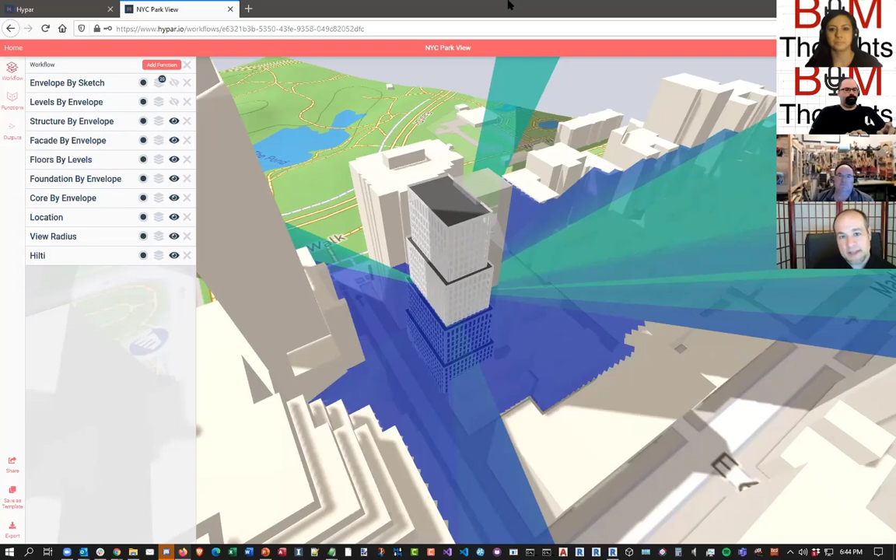All of this is in service of creating a generative design environment where you can combine things we call functions to produce design proposals, like I'm showing you here. This is a site in New York City, and we can actually rebuild a lot of this while we're talking. What you're seeing is a building on this site, with some analysis going on around what views you can see from that height of the building.

A lot of this is adjustable, but the fun part is if I go to this function here and isolate it in context, zooming way in, you can see we've got the beginnings of a piping system, with hangers and everything. That's actually an imported STL of a Hilti hanger—Hilti makes available 3D assets for a lot of their catalog, so we just grabbed one to demonstrate that we could include it.

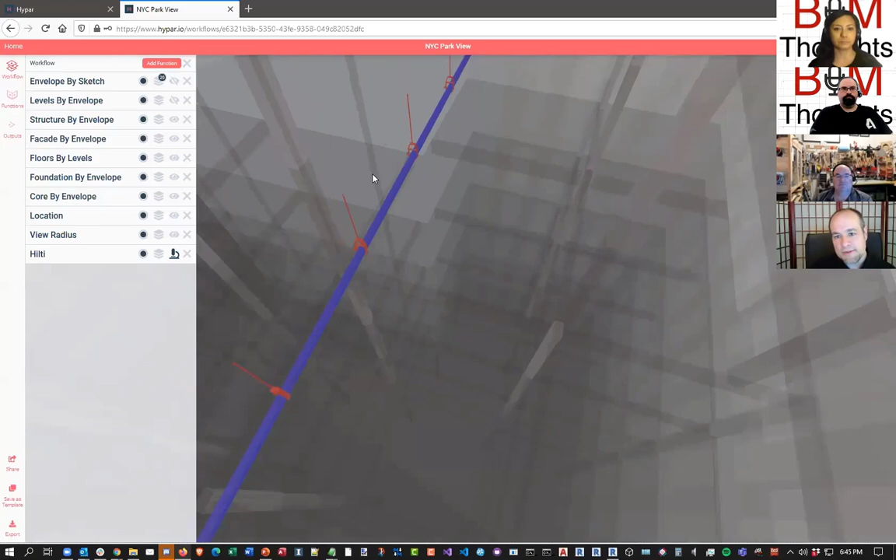The thing is, we're working at this macro, urban scale, all the way down to this very particular device inside a building. So we've gone from a mile down to a hanger, and then hanger back to a mile.

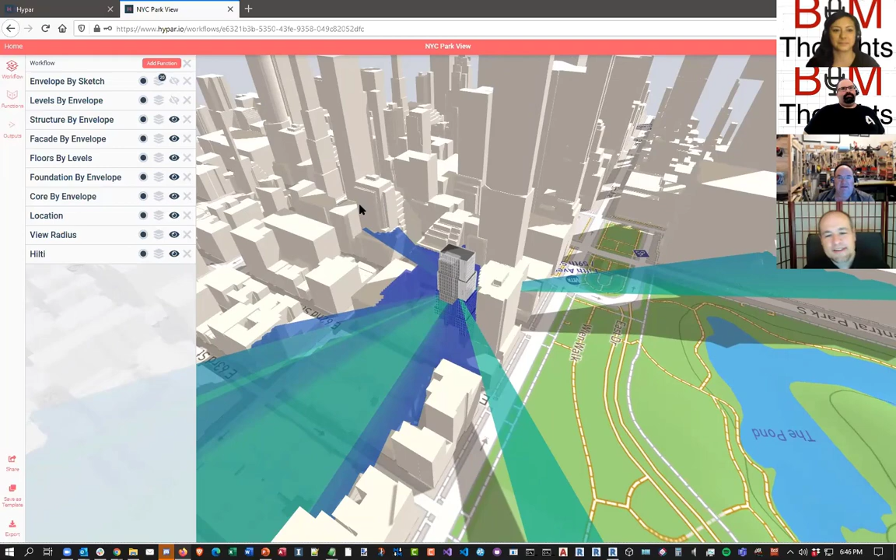Yeah, I'm trying to let our audio people know what's going on as well, since not everybody's watching. Sorry for this. I'll describe more as we go—that's okay if you're not. It looks like Ghostbusters is in there trying to get rid of some ghosts. We can turn that off so it's not so distracting.

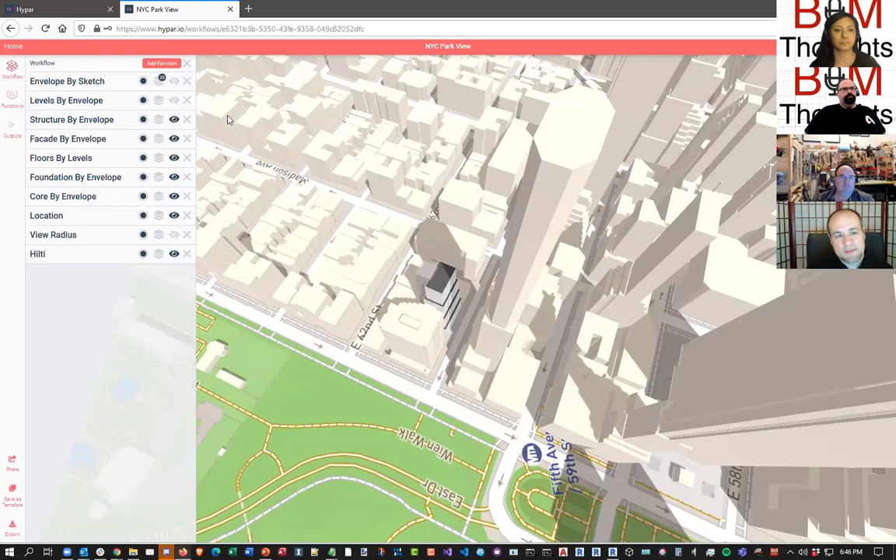Anyway, if we take this apart, on the left of the screen—for those just listening—there's a pile of things with different names, like envelope by sketch, levels by envelope, structure by envelope, etc. It's just a naming convention we use to talk about dependencies.

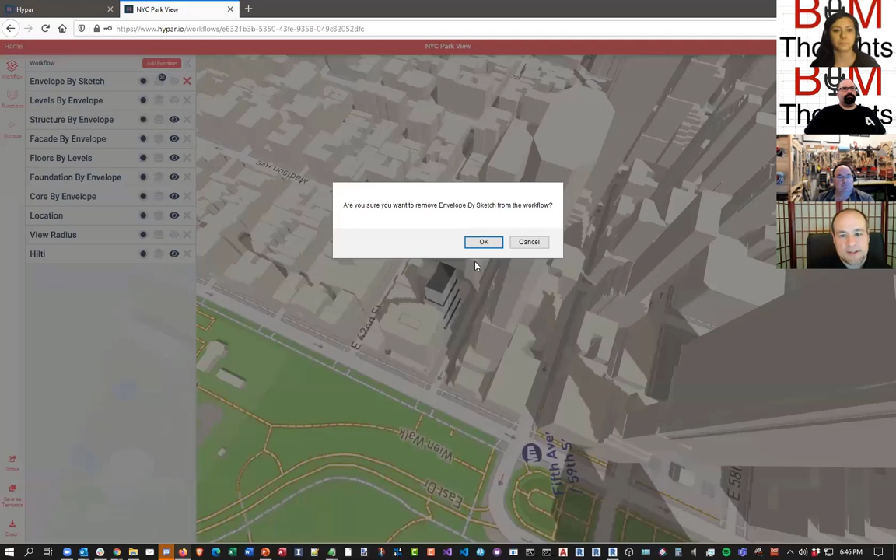So let's break everything here—let's just take envelope by sketch out of the workflow, and all of a sudden everything's going to panic, because there's a lot of stuff that wants a building envelope. So let's give it a new one.

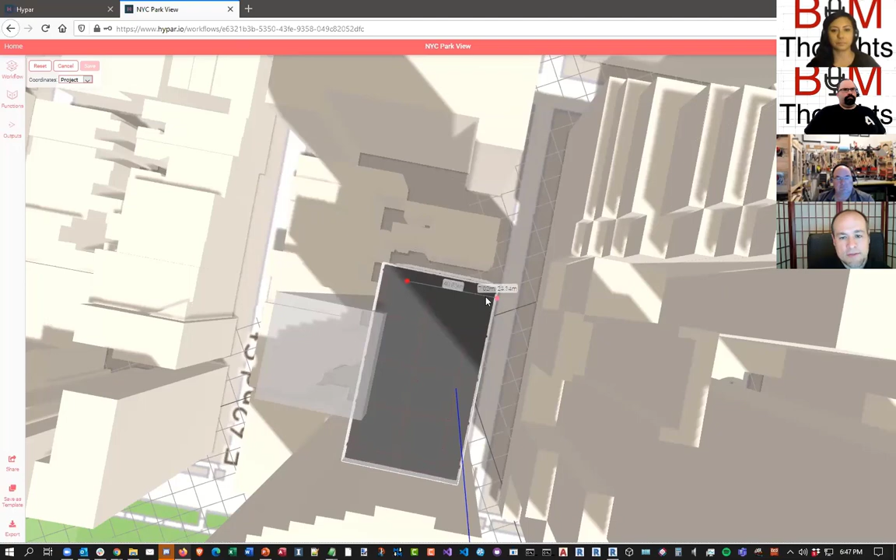Let's add a function, and add envelope by sketch back in. Now it's asking for some input—we'll draw a new polygon, something funkier here. We'll draw like a... oops, maybe not right inside the other building—yeah, that would be bad. But if we give it a different shape here, opening up some space on the site, and save that.

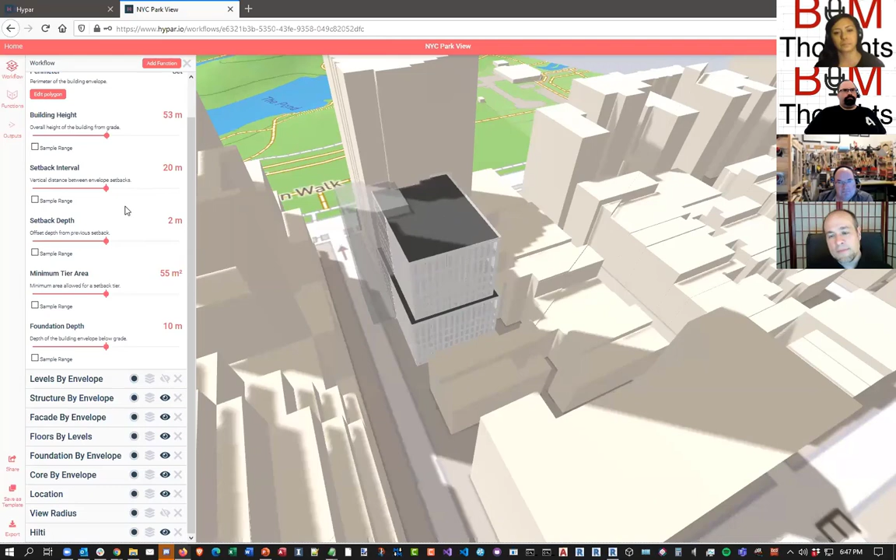What happens is we start generating a new building fabric, and all the other functions start contributing their piece to the proposal, with some greater or lesser success. If you're watching, you can see my marksmanship has somewhat failed, and I've embedded one building inside an existing building—which generally the building commission would call an addition.

In any case, these are all examples we have on our site just to show people the kind of thing you could do with Hypar. We've gotten some good reactions from folks on some of these functions that they find they can use. And the thing is, they're all combinable.

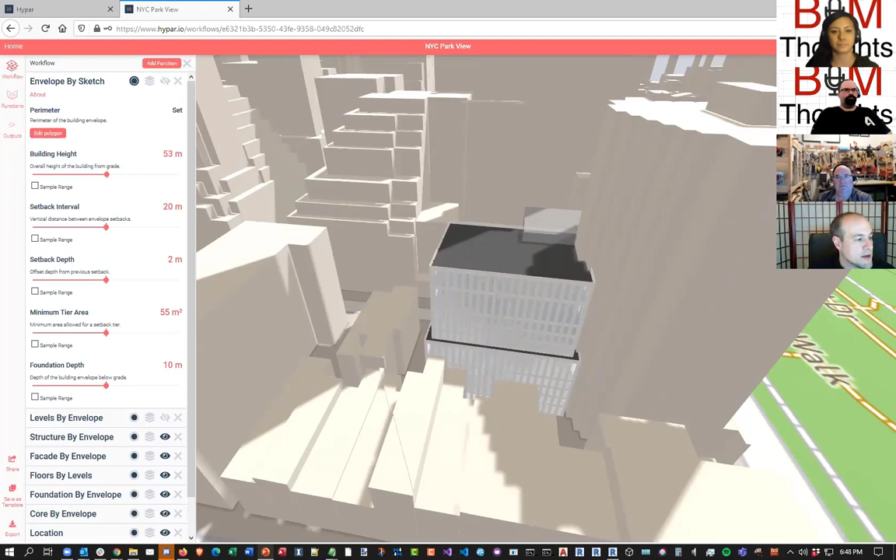I'm going to switch over to a more abstract look at this. Let's bring up the presentation, because what would Zoom be without PowerPoint, really? Taking the audience back to math class—everybody remembers what functions were: you put some numbers in one end, and other numbers come out the other end.

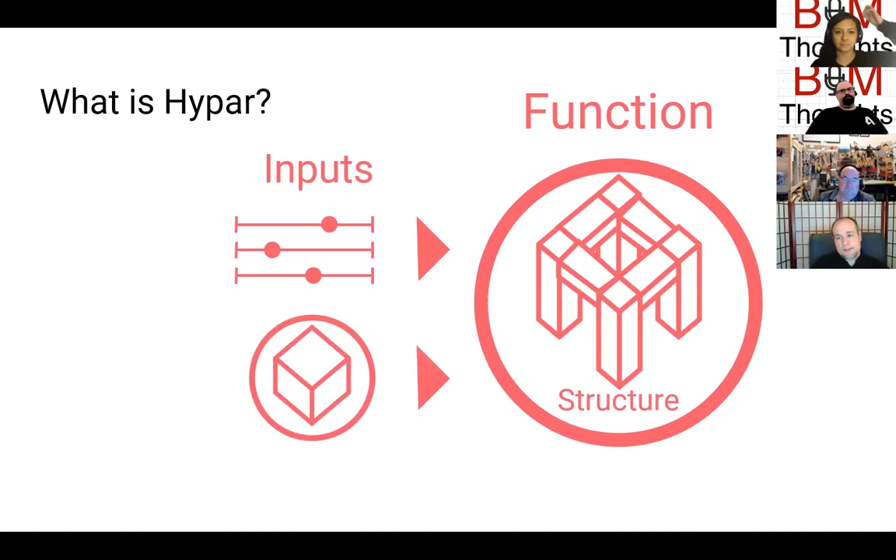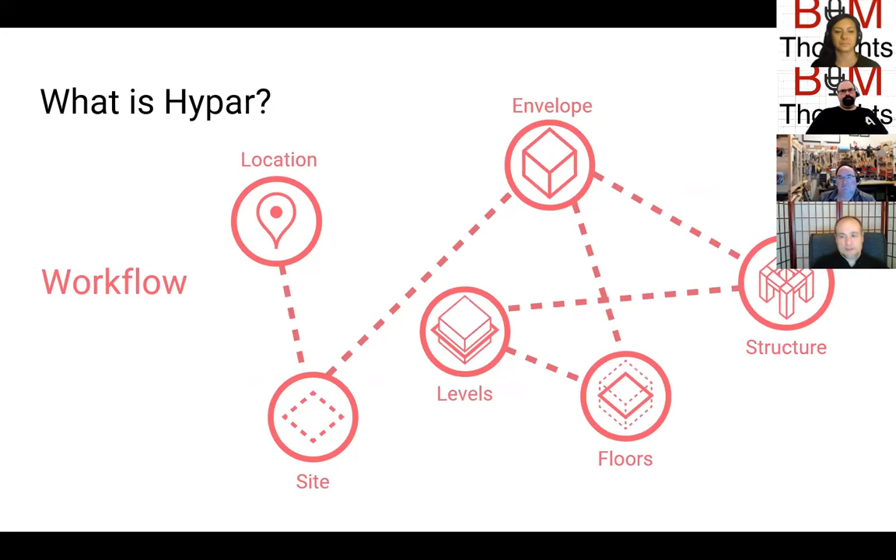We do the same thing. The numbers are various kinds of inputs you can apply, but the output can be something like a structural grid—we can show that in the example I just went through. We can also use as an input something like a building envelope, and all that links together in what we call workflows. That's why, as folks watching the video saw, things started to panic when I pulled out envelope by sketch—because things want an envelope to produce the structure, the floors, or anything else.

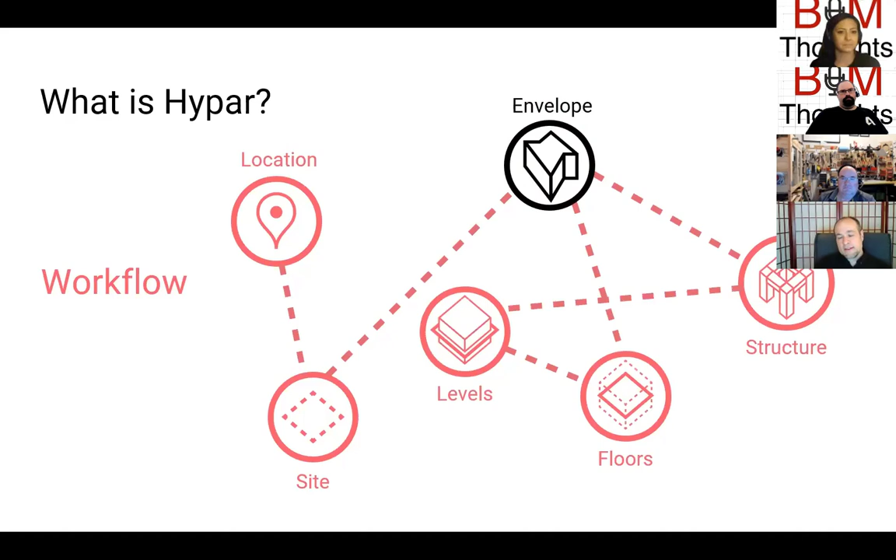The nice thing about this is that if you've got one way of making an envelope and another function that does it a different way, you can swap that out and everything else stays the same.

Again, if we take this out and move our building next door, we're just going to slam it right down into the park. Good idea.

That'll be easily approved. Well, we bought the park. Sorry, Manhattan Public, you're now getting a building in the middle of your park. That's right, look at that.

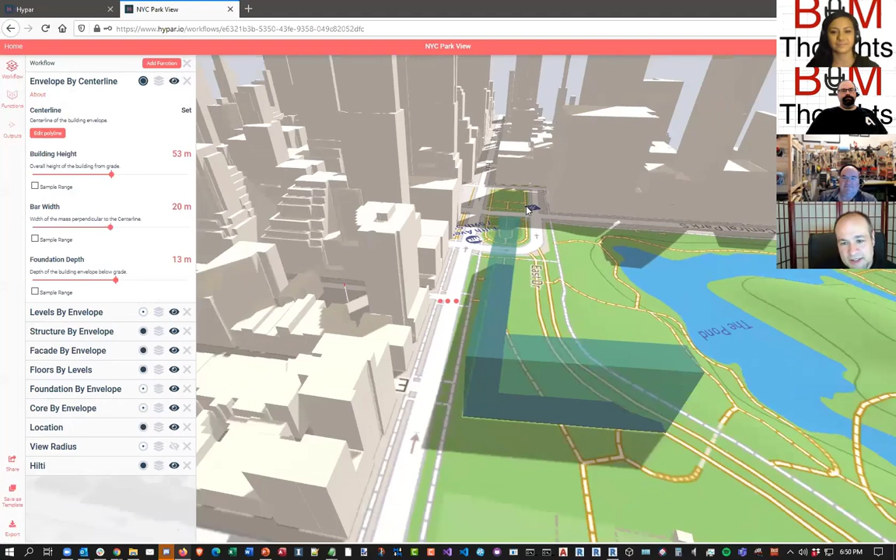This is another building just made by a centerline and a few other input parameters here.

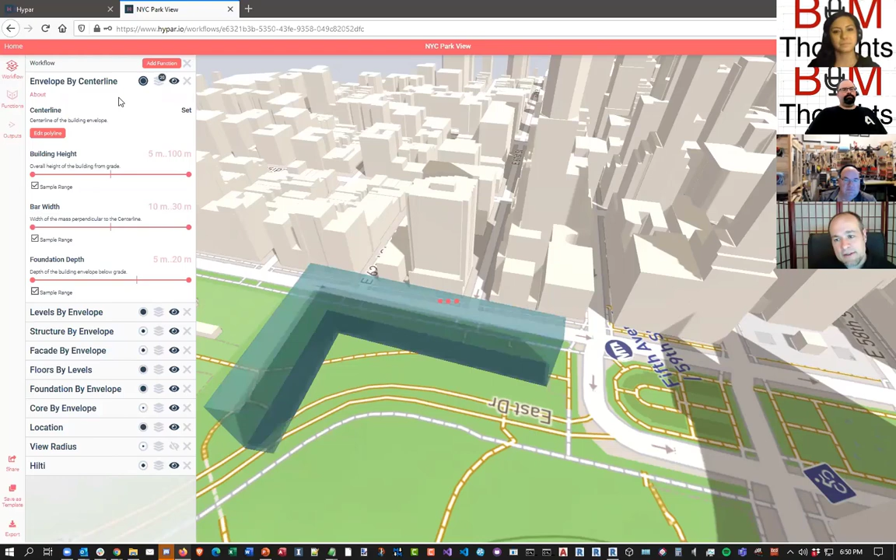One of the fun things about this - we talked a little bit about option generation. So for things that have variable values in Hypar, you can turn on this thing called sample range. Because we're based in the cloud, we can spin up as many servers as we want. We have an arbitrary limit right now of 20 parallel servers, but it's just as fast to produce 20 options as it is to produce one, because it's all parallel.

We don't have a whole lot of variability here on some of these, but here's a nice tiny skinny building we can just throw on there, a nice short one.

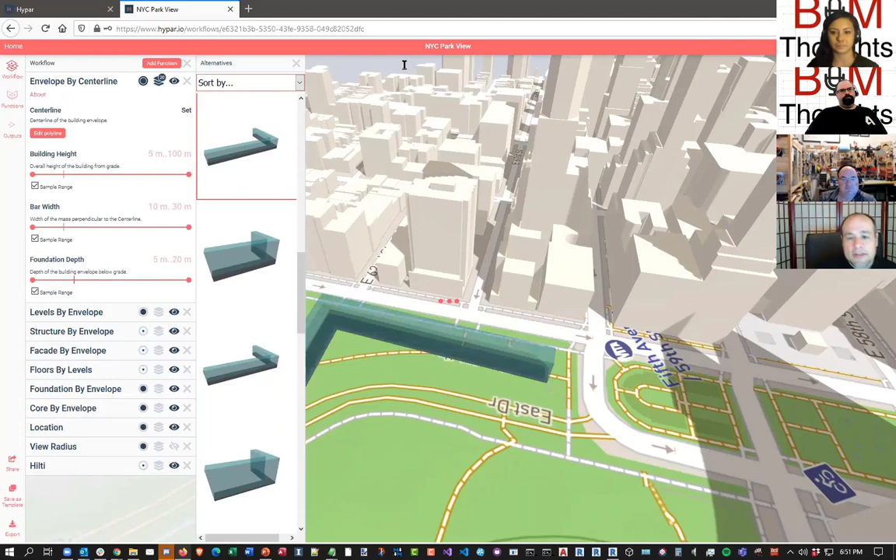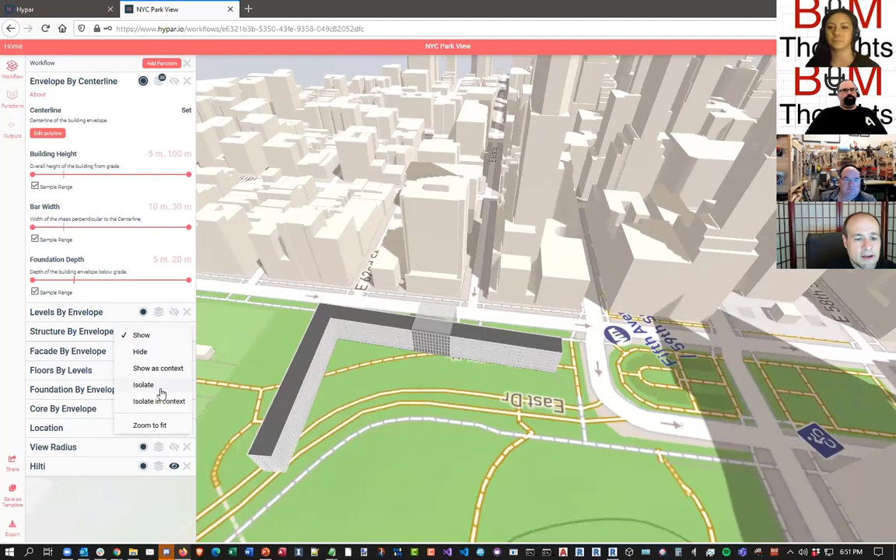So you can instantly change out your options, and then all the other functions will catch up by doing their pieces, like putting in the structure, which we can isolate, or the facade or anything else you want to see. So each of these things is contributing to one proposal.

One of the things we also know is that we should probably be compatible with Revit. I'm going to start something, and this will take a minute or two, but we can try to see the results of this in a pre-baked example.

Everybody who knows Revit is probably familiar with the commercial example, the advanced sample file. So I'm just going to send all of that to Hypar.

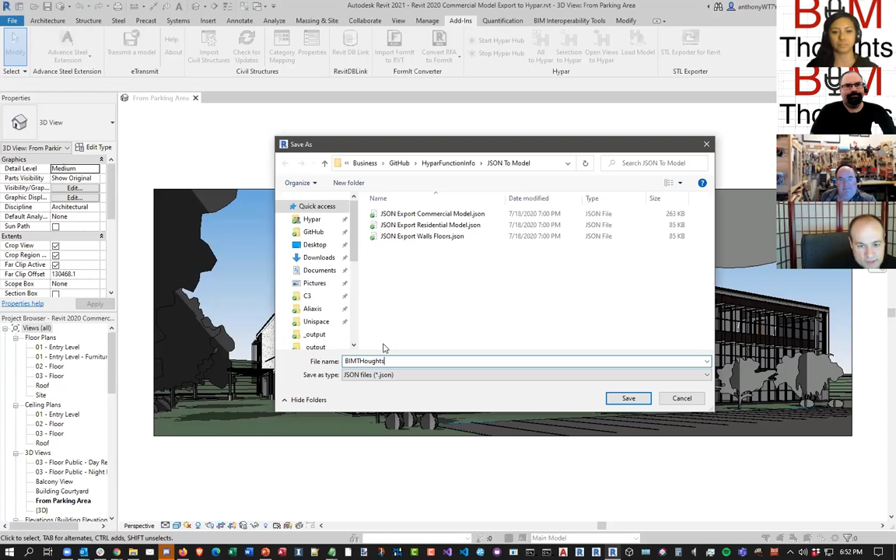Now what's going to happen here is we're just going to save something out, and we'll call this BIMThoughts. Great name, because we must do that. Yes, and because we're thinking about BIM right now.

Okay, so hey, that was quick. Yeah, that was kind of distressingly quick, honestly, but let's see what happens.

You must have a new machine. Yeah, it must be. I'm going to start a new, by the way, fancy new website. Look at that, really that is fancy. Yeah, our website's really been boring for a couple of years, and finally we hired somebody who knew what to do about it. Wow, which one of those guys? Actually, it was our newest employee, Serena. Look at that, great job Serena. We're proud of you. Yeah, we're all very proud of her.

We've, as some folks may know, we've been raiding WeWork. So Andrew Heumann joined us from WeWork, as did Serena. Yeah, we got a WeWorker as well at LPA. Yep, there you go. They're a good group over there.

In any case, let's sign in here and do a new workflow. All the stuff I'm showing here for folks who are actually watching is available to you. You can try this stuff out yourself, and I can tell you where to find some of the example files I'll use.

We've got this thing called JSON to model. Now let's see if that export was okay - the export's kind of new. Let's see if it worked, let's see how big the file is. Oh, it's big enough. Okay, let's drop that in there and let's see what happens. I'm sure it's going to be great. Could be, might not, but I do have some baked stuff that will work.

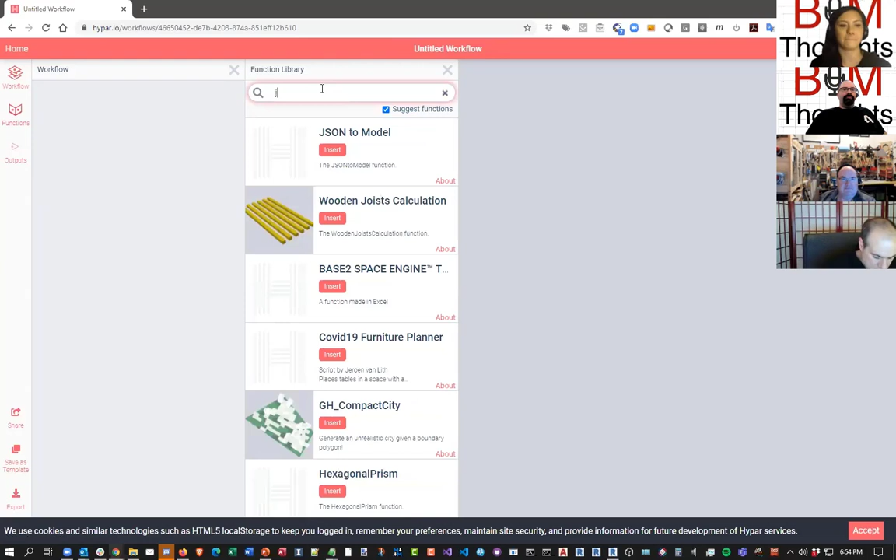Does that mean that other platforms, like a new and improved format that works in the JSON environment, can do that same functionality? Quite possibly. We have a JSON format we use. It's standard JSON, but like any open format like IFC, people are going to use it in a certain way. But there's a continuous idea through all of this: we use JSON, it's an open format, anybody can use it. All the graphics you see inside the window use three.js with the glTF format, which is also really good for dropping into VR.

So we tried to pick technologies that were... here we go. Yeah, definitely something in Firefox I'll have to file.

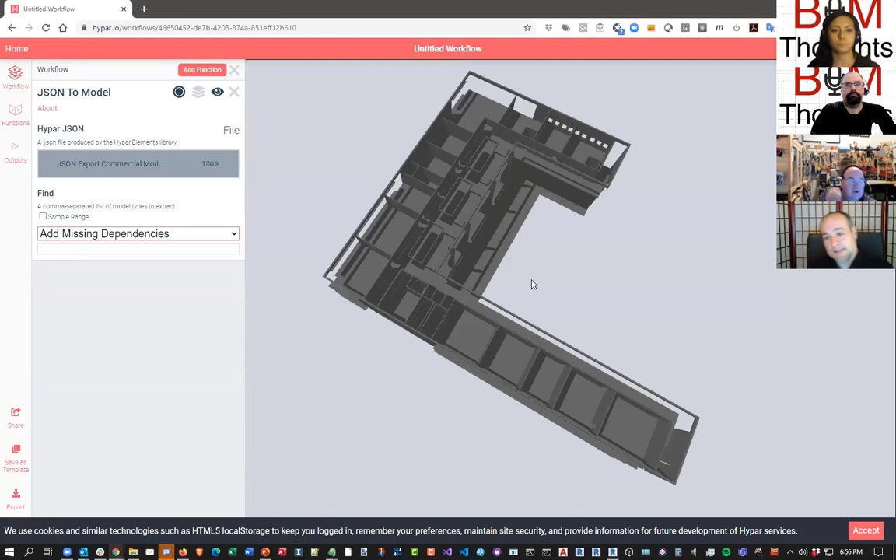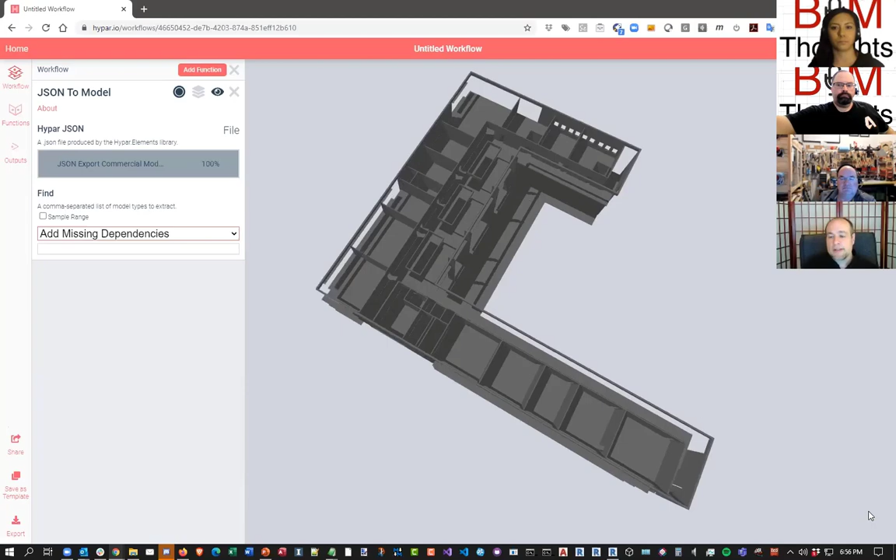So JSON isn't like IGES or DXF. It's more akin to XML. Right, you can write anything into it. So it has to know how to read it. Correct, the syntax is what defines JSON, not the data. And incidentally, Speckle is kind of the same thing, right? It depends on the parameters, at least last I checked, to interpret the data flowing through it.

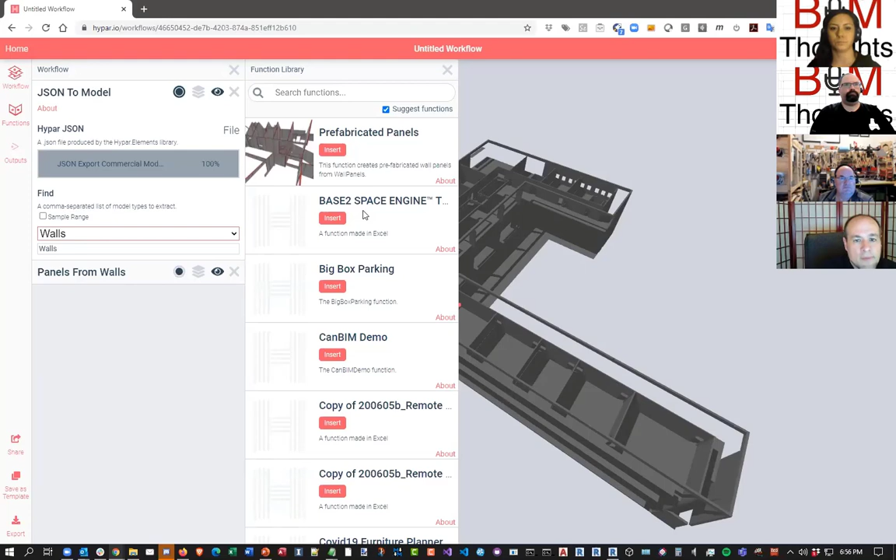Anyway, we've got our Revit model in here. I'm going to add in finding walls, because then we're going to do something cool. Let's add a function called panels from walls and let that run, and we'll also put in prefabricated panels. So for our studio audience, we've added two other functions: one that breaks walls into panels, and another that actually uses those panels for something else.

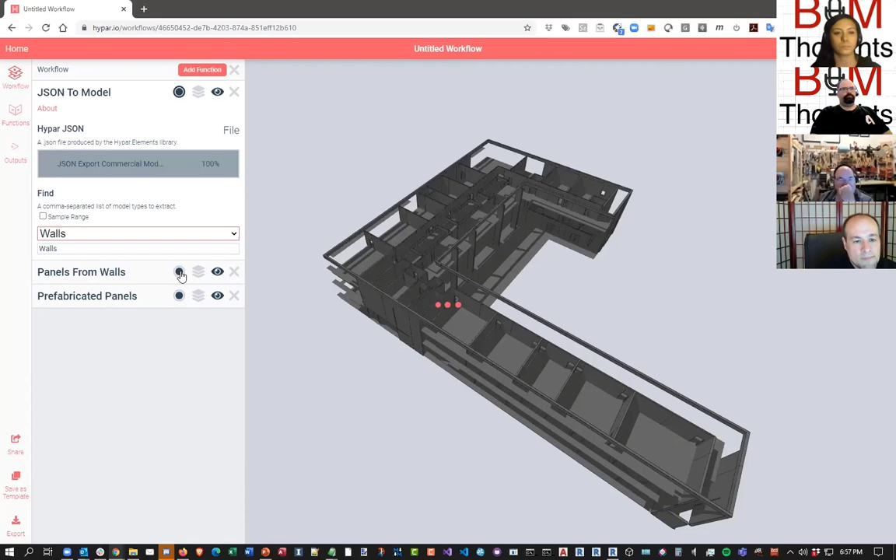Let's open this up. Okay, we're back. So if you open this, it has some settings on what the panel length is, and I'm going to turn on color coding and isolate this guy so we can look at him alone.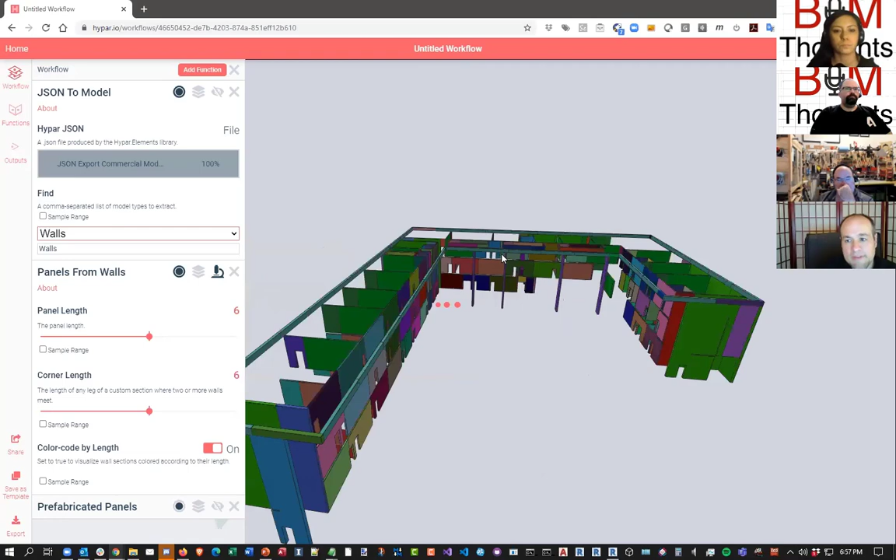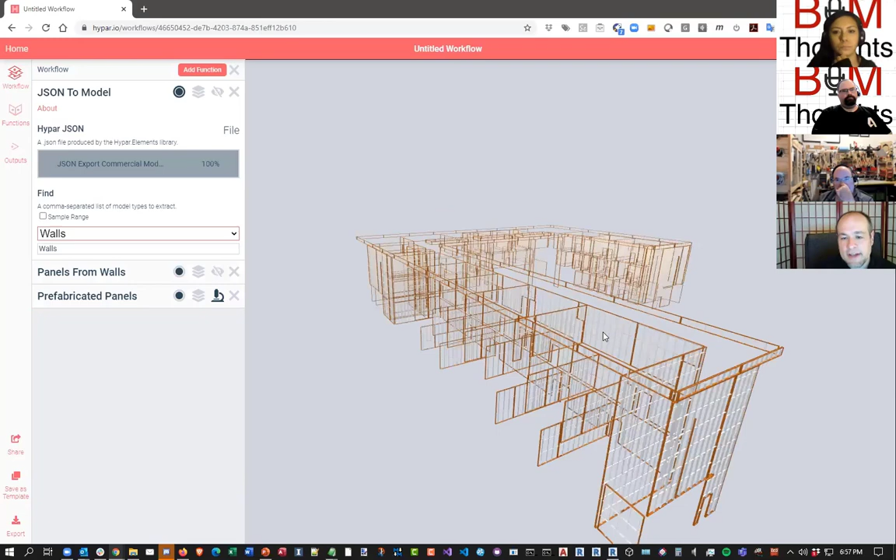So what this other function has done is taken the incoming Revit data, the wall data, and broken it up into individual panels. And what the one below that has done is taken each of those panels and framed out each of them, and it takes about 5 seconds to draw it.

So you could see that on the construction side, if you had a bunch of procedures for taking an arbitrary model and processing it in a way that's compatible with your delivery methods—maybe deciding cast-in-place concrete or precast—you have functions to show you how that might work. You could inject it into this workflow and examine your options here.

And the same thing is available on most Hypar functions. You can turn on sample range, and we'll start creating a bunch of alternatives, in this case just changing the stud spacing. So when you turn those into panels, we said okay, these walls, we want to make them and put some metal studs in them. And it took whatever you defined as those metal studs and threw them in the wall.

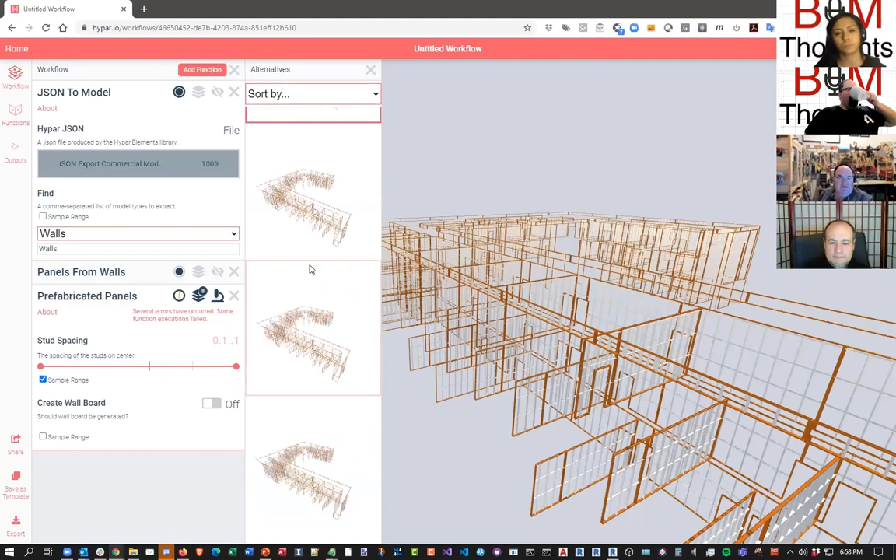And now you're saying, figure out different ways to maybe optimize the metal studs for less studs or whatever. Yeah, everything we're seeing here is just procedural. So within the last couple of months, we haven't released it yet, but we did implement an optimization engine that uses a genetic algorithm. It's not ready for public consumption yet because it's rather complicated to set up, so we're working on simplifying that so you don't need a degree to actually do something with it.

But this right now would be a key difference between generative design for Revit and what's available to folks on Hypar now, because what I'm showing you here is kind of the equivalent of a Dynamo script or a Grasshopper script, and there's a set procedure that it's running through.

Generative design for Revit is actually also doing optimization goals, and that's something we're going to release, I'm sure, before the end of the year. So we'll start adding that. One of the differences we're going to be introducing is - and Autodesk doesn't tell me its plans anymore, so maybe they're going to do the same thing.

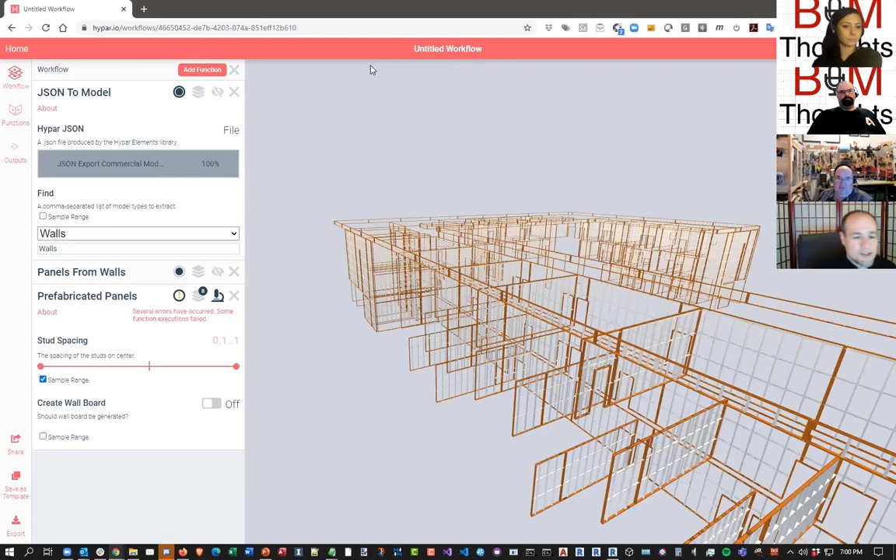But we're going to have the capability to have multiple algorithms. Folks that really get into optimization and machine learning find that different algorithms are better at different types of problems, so it's good to have a library of those you can use. This isn't my background, but it is our CTO's background - he spent 5 years at Google, so those folks are all about the machine learning, optimization, and data. We've been leaning on our CTO quite a bit to start implementing some of this stuff.

In any case, major differences: we're massively parallel in the cloud, and generative design for Revit is on the desktop. I'd be speaking out of turn to say whether they're doing any kind of parallel processing or not. But we think this kind of thing is just a lot better to do on the cloud, because nice things you can do immediately are like sharing the whole workflow to folks, or sharing it to just one domain so everybody at your company can get it, but nobody outside can. It just makes it a lot easier for collaboration if you're already on something connected to everybody's device.

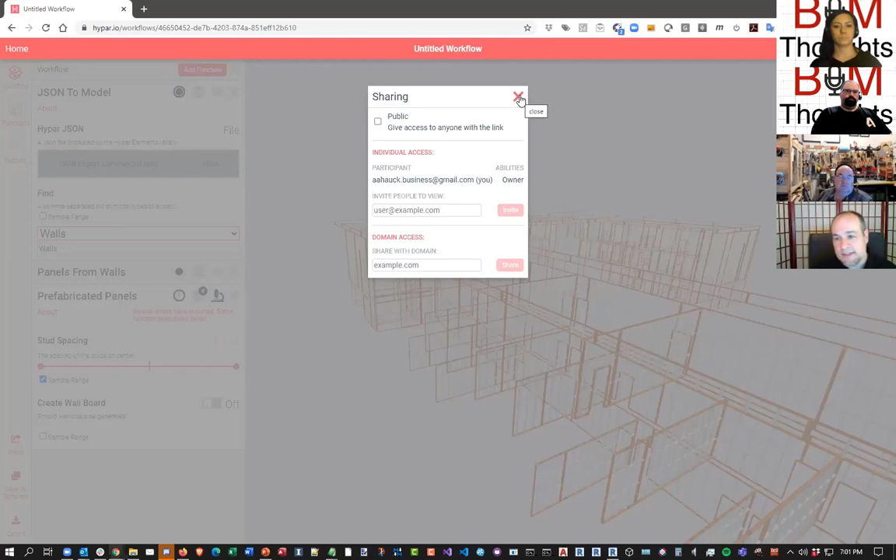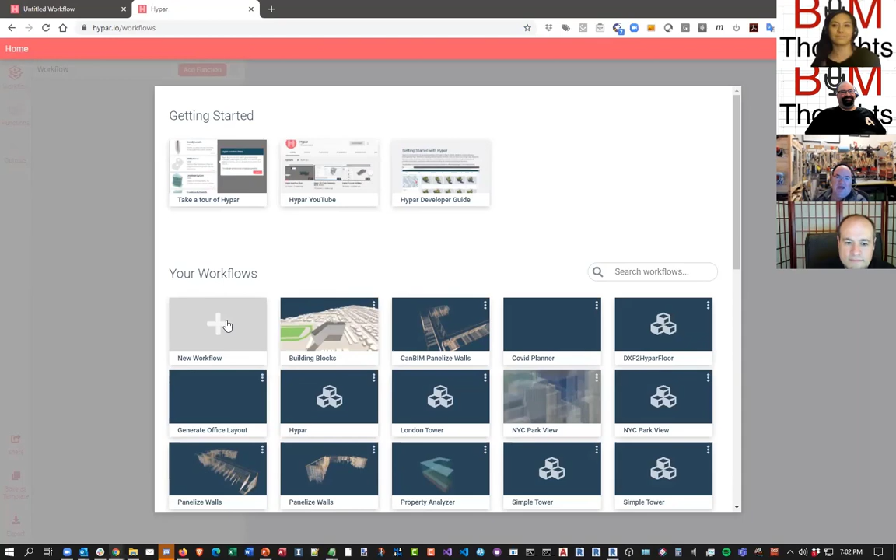One of the things when I've gone to conferences and looked at generative or iterative design is you need to be a programmer to figure this out. You've got to be like Dana - someone who knows Dynamo very well - and then plug all the things into the generative design or iterative design software, and then it runs through the paces of moving all the sliders for you. Is that still the case today, or has it moved past that?

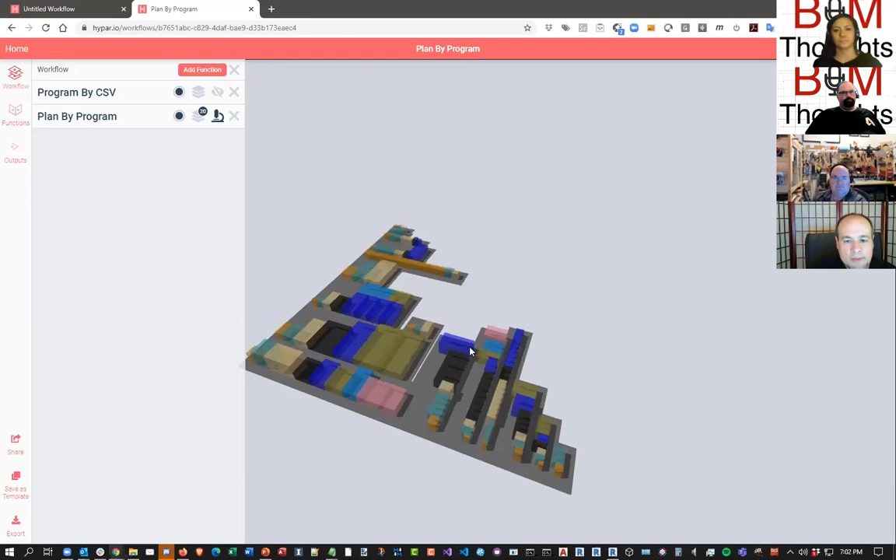It depends what you're trying to do. For example, I brought this one up because I could kind of tell where you're going. So this is a pair of functions here - one's called program by CSV, it's got some options, one's called plan by program. And this looks like a warehouse to me.

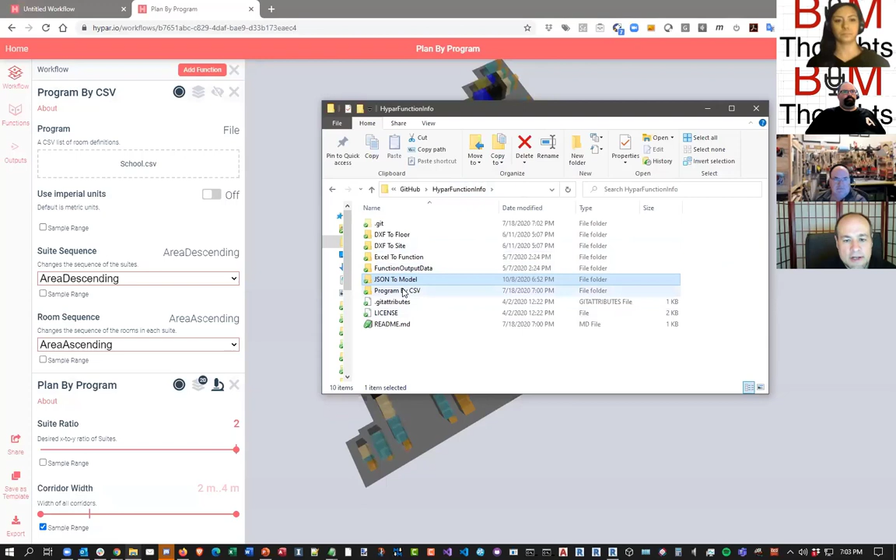Well, we'll talk a bit about what it is, but let's go into another folder here in our examples. This Hypar function info thing is also a GitHub repository, so you can go find this and grab all these files and try this stuff out that I'm showing you. But opening one of these in Excel is easier just to look at them that way.

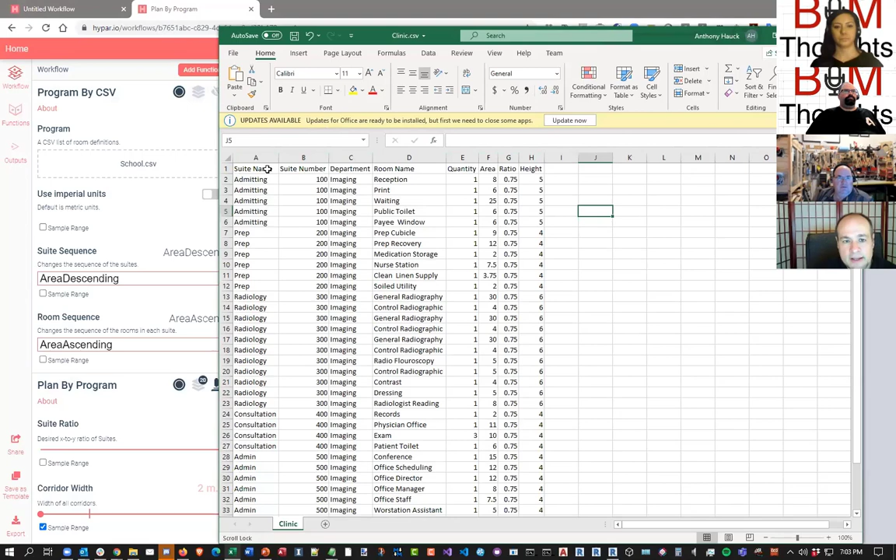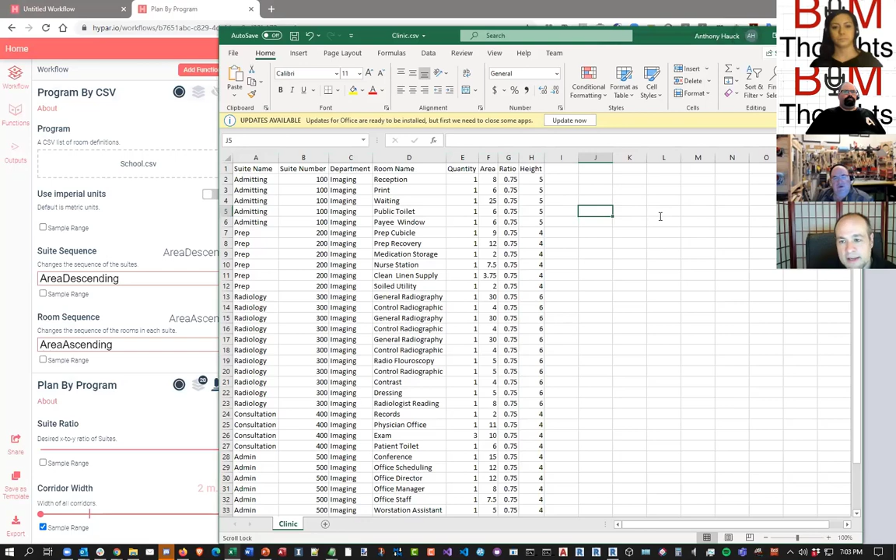CSV is Excel, and what you'll see in here is kind of a typical building program, right? We've got a suite name, a number, associated department, the name of the room, the quantity of the room, desired area in meters, and the ratio. It's pretty generic here. Is everything you do in meters, or does it just happen to be the sample data?

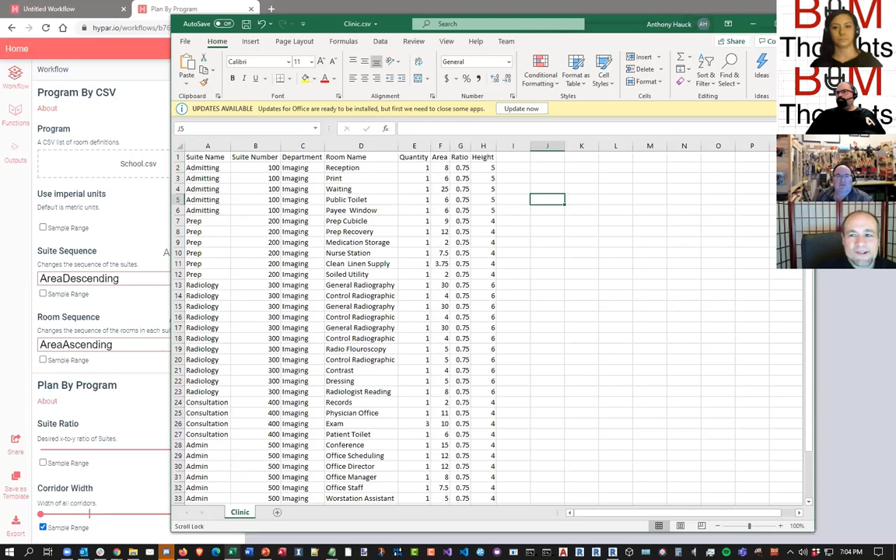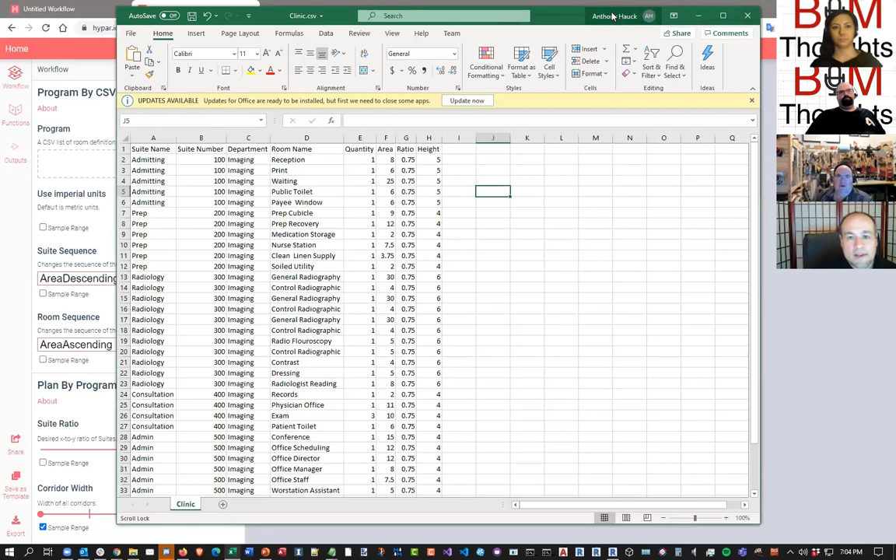We do everything internally in meters, so we actually use standard units throughout. That's all metric, but of course it's just a matter of multiplying for other units. We're actually working on something for a customer right now - a global customer - and they need to see things both in square meters and square feet depending on the region they're working in, so we have that capability to switch back and forth. Okay, so you can switch back and forth at will. Yep.

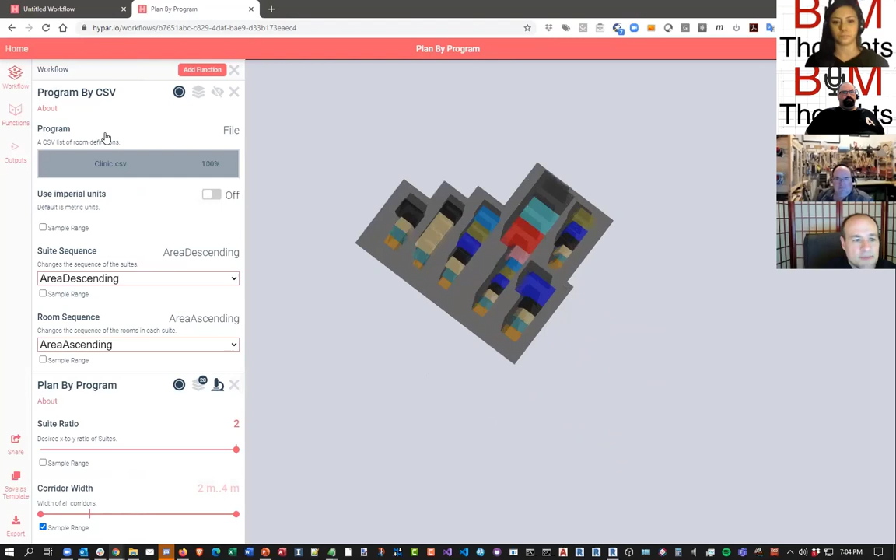So if I grab this, let's grab this clinic thing, which is a much smaller program than what we're showing here. What's happening is it's using a bunch of rules to lay out this stuff. Let's put on some names so we can actually see and understand what we're looking at here.

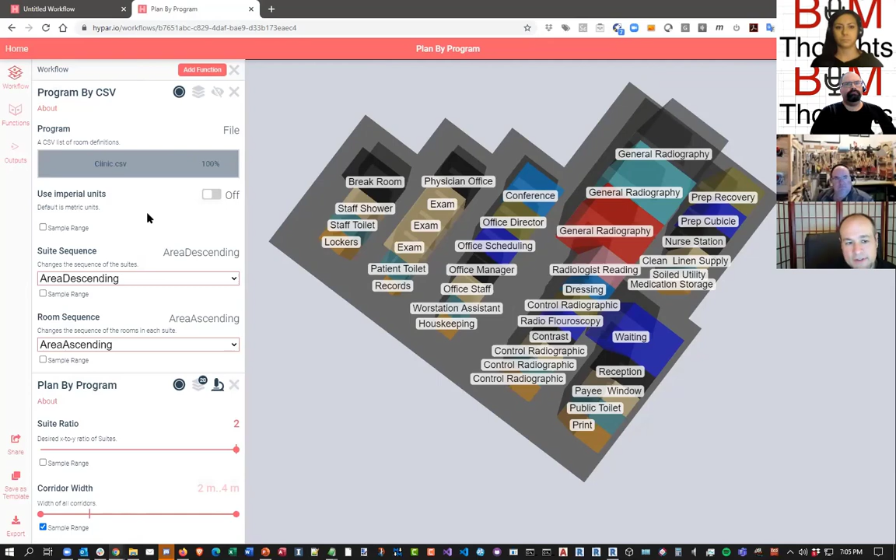What's going on is there's this thing that turns that CSV into a building program, and that gives you some options to manipulate it. For example, we could change the suite sequence to what's listed inside that CSV - in other words, it's going to just run from the top to the bottom and say, I'm going to place this suite, and then inside that suite you have an option for how you want to place the room. So just the kind of vanilla way to do it is listed, right?

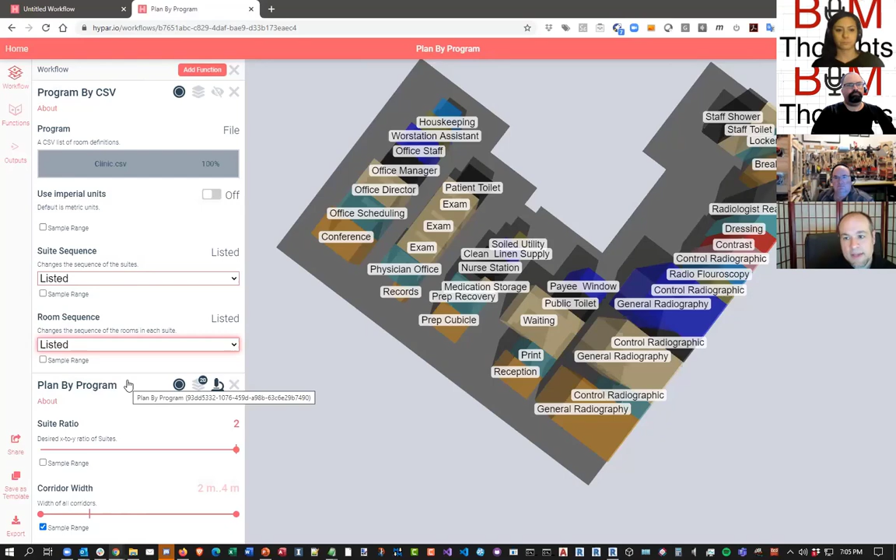So it's gonna start at the top and just run through linearly and place them as it can according to the algorithm. The algorithm is down here, and it lets you do all kinds of things to start getting different options. So you could send it up to multiple levels if it can't find a place to place something. You can turn on diagonal adjacency, and you start varying your results in that fashion.

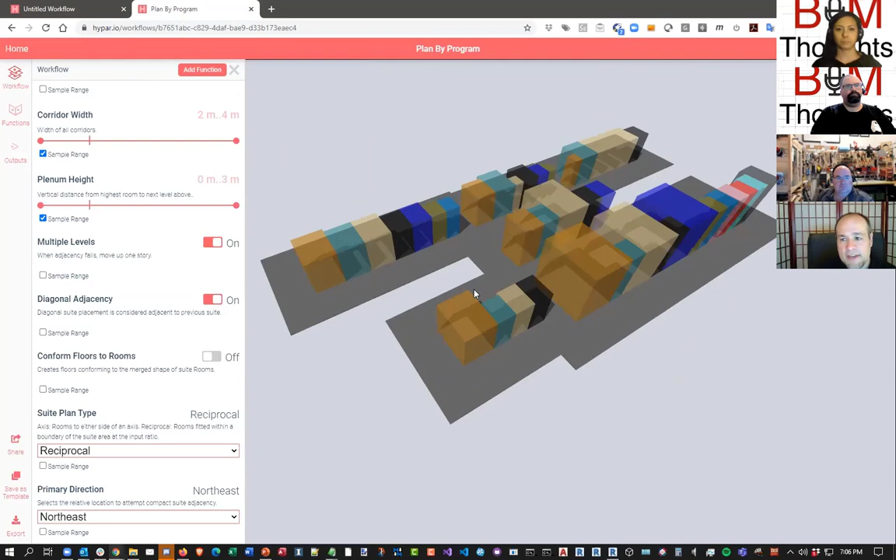And so I've spent a couple of hours sometimes just playing with these and looking at all the different options you can get. They tend toward a bit of similarity, but you can start... Yeah, I don't see much difference in those.

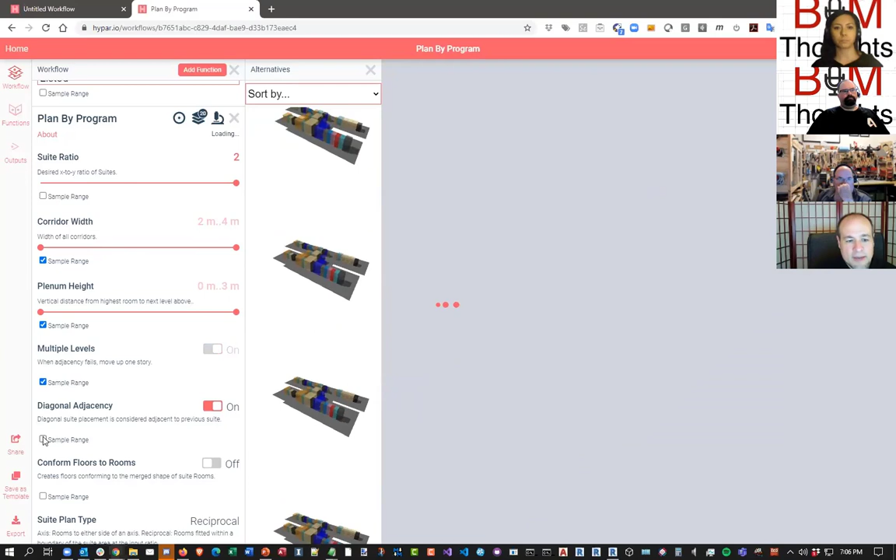Yeah, when you start sampling range, and it starts toggling some of these on and off, then it varies a little more. Don't make a liar out of me. There we go, there we go. So these are ways of kind of rapidly exploring different options and approaches. And then of course the question is, okay, I've got a thing I like, what happens?

So something we're working on that you can try out if you download the Revit plugin, and you want to jump through a lot of hoops because it's still in beta, but I can show you instead a video of it working at its best.

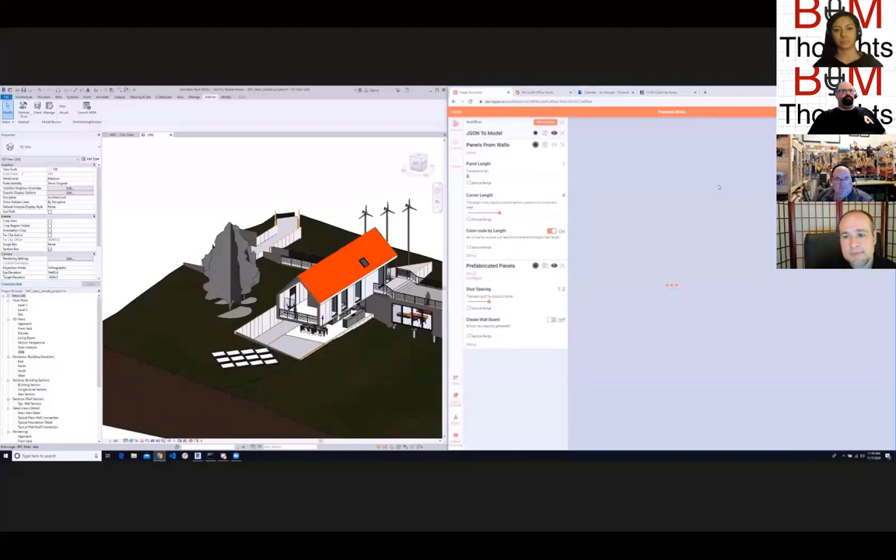So that framing example I showed you, we also plugged it into something called the Hypar Hub. So we're going to generate an option on the right and then give it a couple of seconds in Revit, and it comes in. Look at that, Revit. And if we change it over on the right in Hypar, then we stream it down into Revit with a tighter stud spacing. So we just put all the studs into the regular sample file.

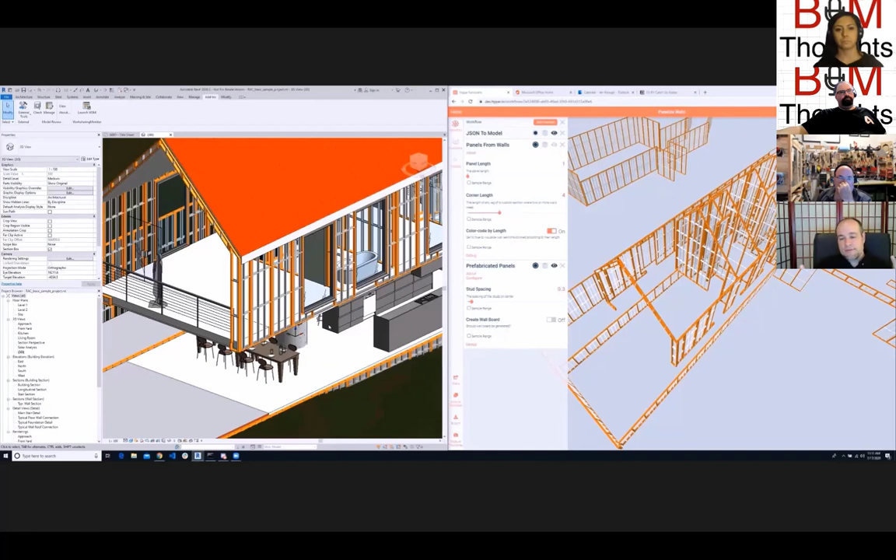So what we've done right now, the state of the plugin is this is merely a preview. So we're actually drawing this inside Revit, but those are not real Revit elements yet. So the next stage we'll do is the bake it button. Call it, and we will actually bake it as real Revit entities right into the model. So right now it's still cookie dough. It's still good, but it's not a cookie.

And the idea is that you should be able to try a bunch of design options, see how they're going to deliver into your model, and then finally, for real, send it where you can go and document it and such.

So the other difference between what we're doing and what generative design is doing right now in Revit is, fundamental to what Hypar is, or what we hope it will become, is that we're trying to crowdsource this. We don't want to sit in Hypar constantly making new functions for people to use and try to be the answer for any given sector. We don't want to be like, Hypar makes the best warehouse designer or shelf deployer or whatever it is. We do all this stuff as examples because we know that the real expertise is in the industry.

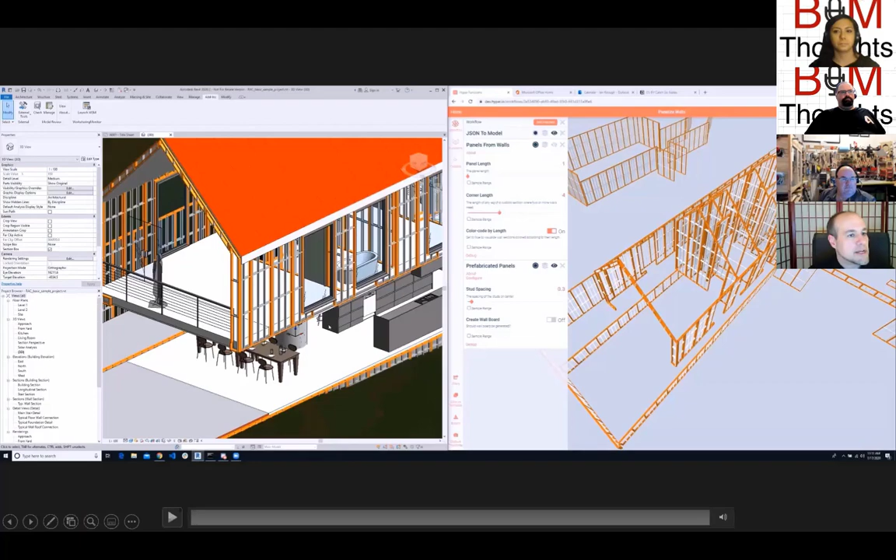To your earlier point, Bill, for some of that stuff, yeah, it would really help to be a programmer, but I can show you a couple other things over here. Hang on, PowerPoint is not cooperating, so we're getting the logo. Let me flip up here. So we've done a couple of things in the last few months since we talked.

So one of them that might be interesting to folks is we have a Grasshopper package so that you can actually make nodes. And here, I'm going to slow that down a little bit because I keep meaning to redo this video. But you'll see in the upper left here, folks who are watching, that this rainbow facade is being made inside Rhino using Grasshopper. This is actually one of Andrew Newman's things. So you can see that with these pink outline nodes, because pink's kind of one of our colors.

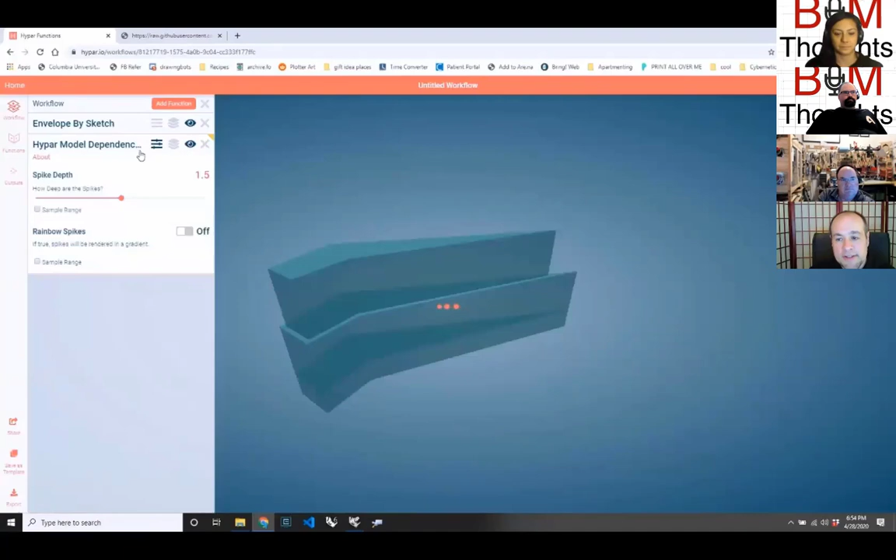You make a Grasshopper script with extra nodes that take inputs and outputs for the model, and you can take that script and drop it right into Hypar, and we'll turn it into a Hypar function that, because it has those extra nodes around the perimeter, is compatible with everything else in Hypar. So you can take something like our friend envelope by sketch here. Andrew's going to draw a quick one, then plug in this other Grasshopper script and wrap that envelope in a new facade, and turn on the pretty colors. So folks who are comfortable in Grasshopper have an avenue in.

And then the other thing that we think is unique, but I'd been thinking about for a long time since I left Autodesk, is with all this Revit family content and scripts, it's a great capture of expertise. But something we used to say a lot at Autodesk is that our biggest competition for engineering customers is Excel, because every engineering firm, and quite a lot of architecture firms and beyond, use Excel as a general computation tool.

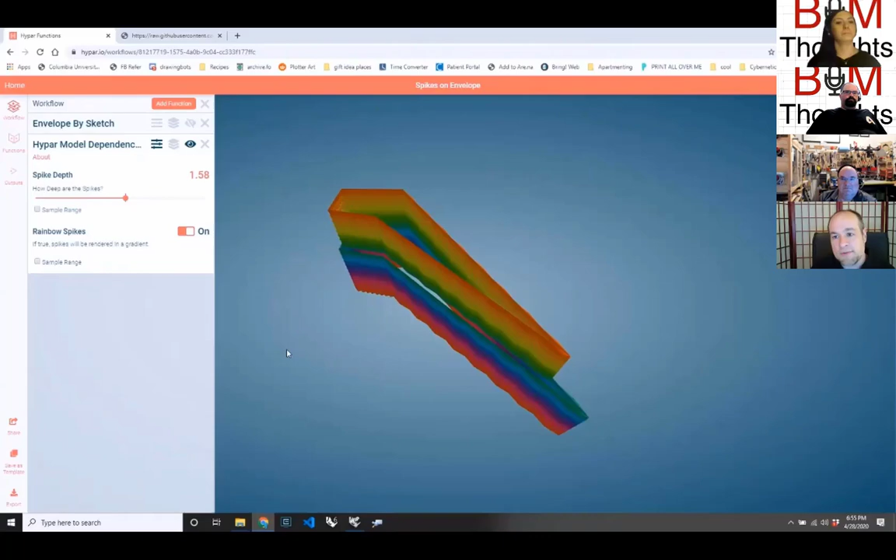So you can turn an Excel spreadsheet into a Hypar function. This is essentially dressing up a spreadsheet with some extra naming stuff, so you say some cells are inputs and some cells are outputs. And just like with the Grasshopper script, you can drag and drop it into a window, we'll process it into a Hypar function, and you can use it in a workflow. We're trying to go to where the industry is, not trying to get everybody to come to whatever idea we have.

So we're doing our best to try to get out and help people capture the expertise that they have in their firm in some way that they can distribute it. Because one thing that especially folks who've been on the IT side know is that somebody comes up with a really good spreadsheet to do something, and they email it to their colleagues. Then they need to make a change or fix a bug, and they send another one in email, and then which version should I be using? It's not great, right? We have that problem as well with project planning. We have all this great software to do project planning, and they're still doing it in Excel.

And I won't say which firm I know does facade design inside Excel, graphically. I've seen it. Sort of like that guy from Japan who draws in Excel. So for a lot of uses, Excel's a great tool. I've been impressed with it since Microsoft came out with it. It always seemed to be actually the best part of MS Office, and so people gravitate toward it.

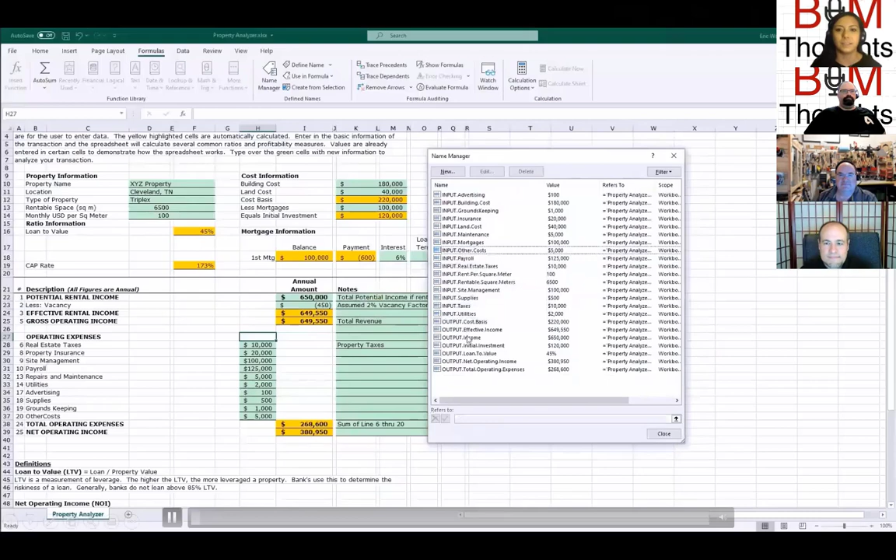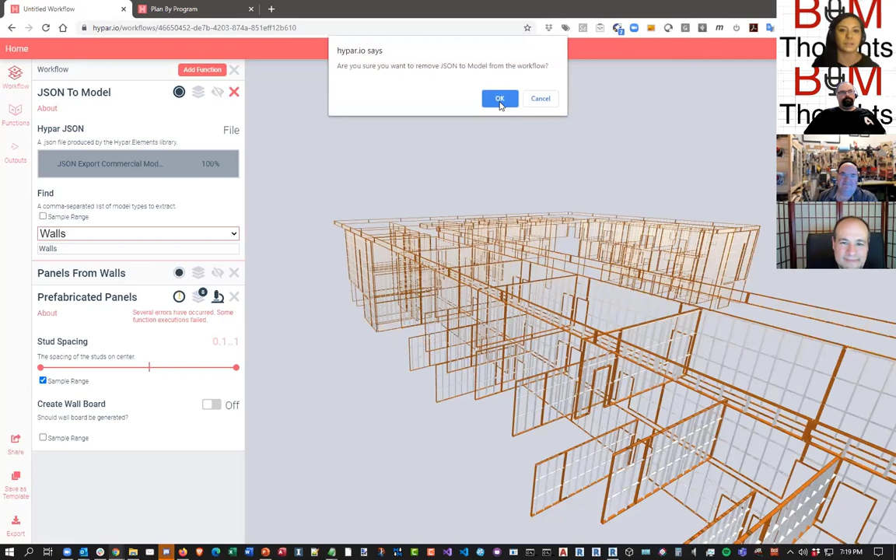He actually answered my question about the Revit plugin, that seems really awesome, and I can't wait for it to get on my computer so I can play with it. It seems like what Bill was alluding to, the education you need to run some of these tasks, having to understand a new program. I joke all the time about how I don't know Bluebeam because there's so many buttons. It's just having to get into a new program and learn something. I think bringing it into Revit and having it as a button opens it up to so many additional users, I think that's awesome.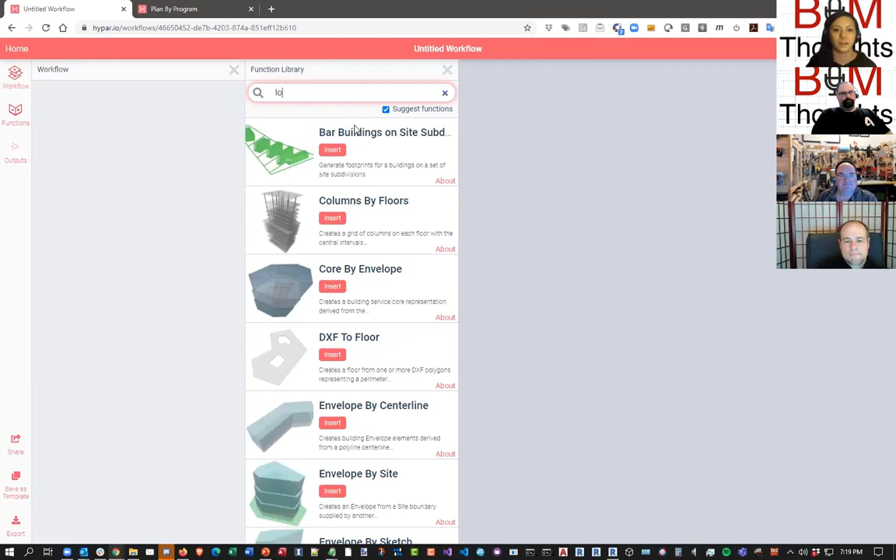I think this is really fantastic. I've watched Hypar grow a little bit, and I think where it's going is really fantastic. One thing I'm questioning is, especially with the current atmosphere and everybody thinking about going back to work, I'm sure you guys have gotten a lot of requests about social distancing and those types of things.

Case got really excited, for those of you not watching, about the COVID-19 furniture plan button. We did not write this one, this was somebody else, Jeroen van Lith, who created this.

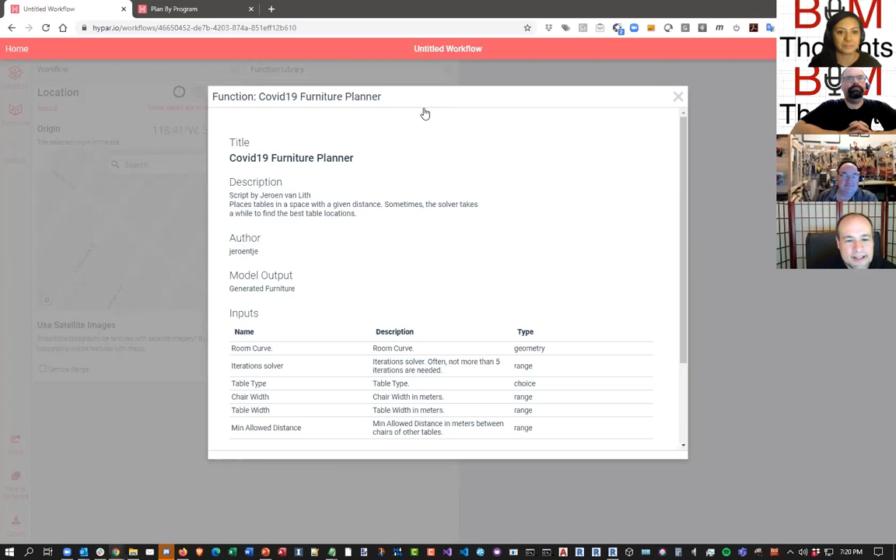Let's see if it works, I've seen it break before. Let's find out, I don't know what it needs, so let's live on the edge. Let's take out the location. Okay, it wants a polygon, so let's draw one. The little right angle symbols that come up when you draw are amazing, those are so awesome, gotta love the locks.

Those are so awesome, gotta love the locks. When Matt gets back from vacation, I'll tell him he invented that. So yeah, this is the thing for folks to try out.

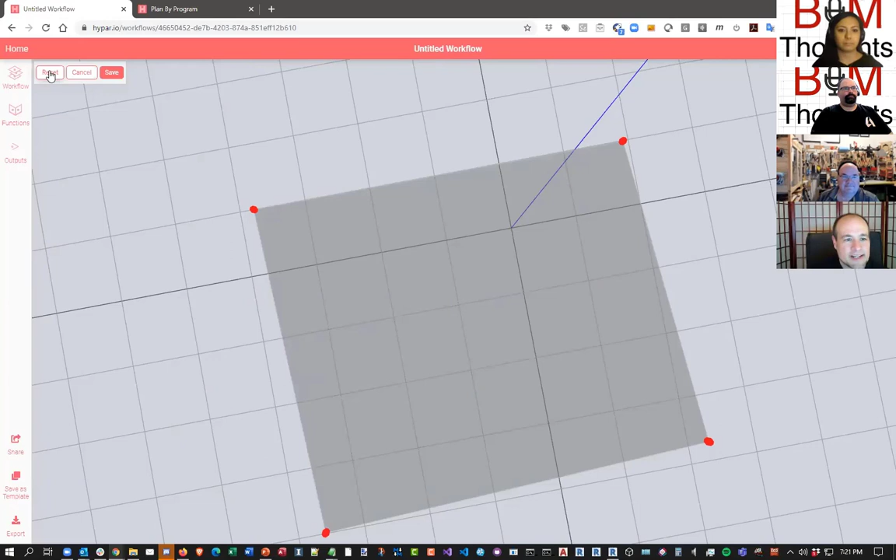Also, Hypar for Grasshopper, we actually have to run Grasshopper on the cloud, so it will take longer, assuming this one works. Well, that's the beauty of live demos, right? Yeah, so this one timed out. It's possible we can try one more time with a much smaller polygon and see if that fixes it, because we shut down any function that tries to run for more than 30 seconds.

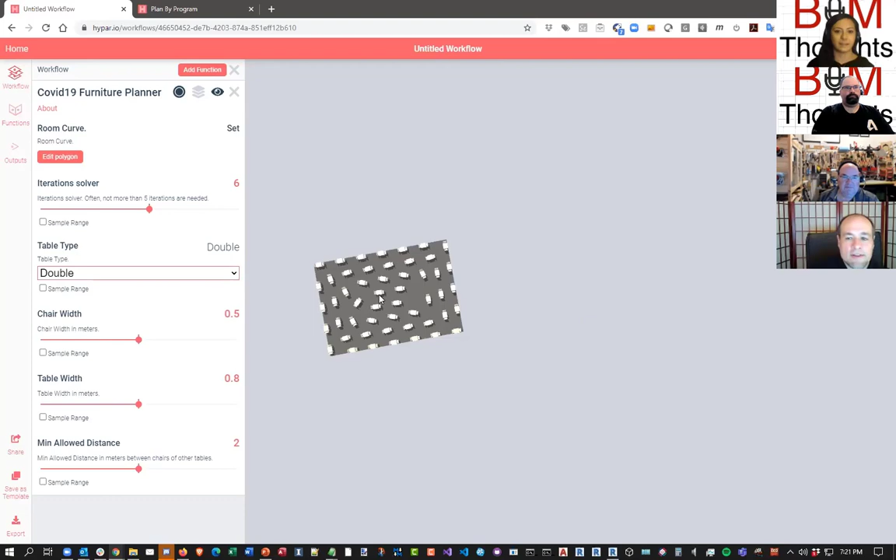However, one of the things that we're going to add is what we call metered results, which will let you run a longer process, because there are optimization processes that can take a long time.

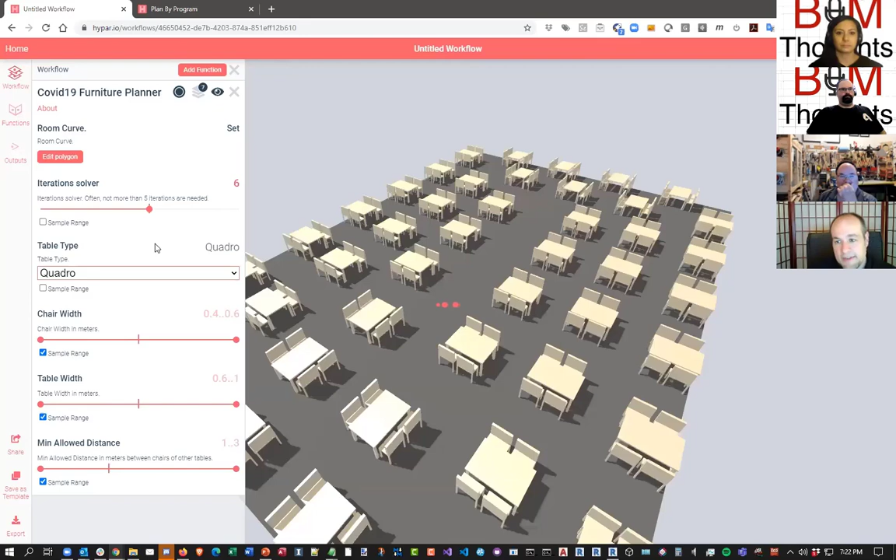So this person has got an actual solver running inside his Grasshopper - that looks seriously optimized. He's got his various parameters, we could do the quadro, let's sample our range and our table widths and our minimal allowed distance. He has anywhere from 1 to 3 meters. This is going to take a little bit, but this is actually an example of optimization going on that he's just built into his Grasshopper script. So you can do that - wow, look at that - we haven't built it into the platform.

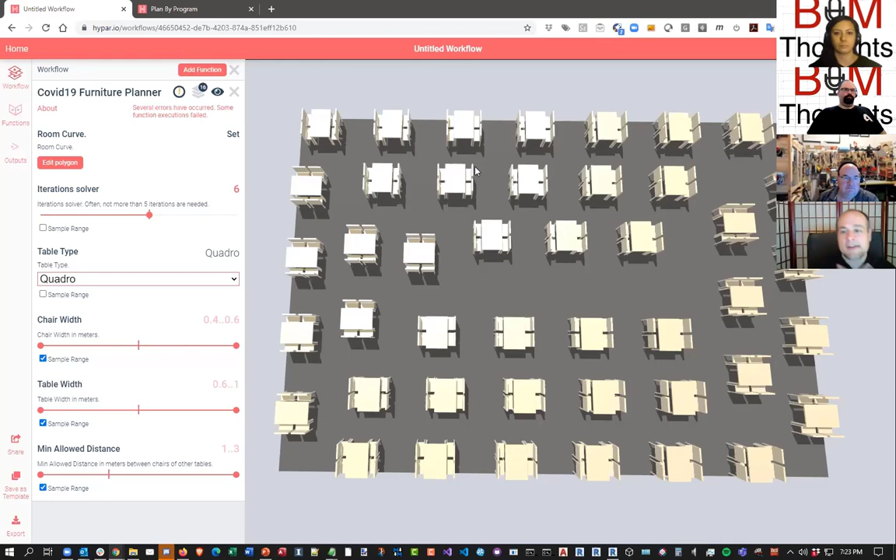So yeah, this has come up, and it's kind of the topic of the moment. Some of the work we're actually doing with one of our customers is they have real data about this stuff, and what office occupancy will be like if you're trying to plan for safety compared to pre-COVID. It's fascinating.

Here we have a lot of different options on how to lay out our COVID compliant office, from quite dense with only a meter apart, to quite... don't sneeze on that one.

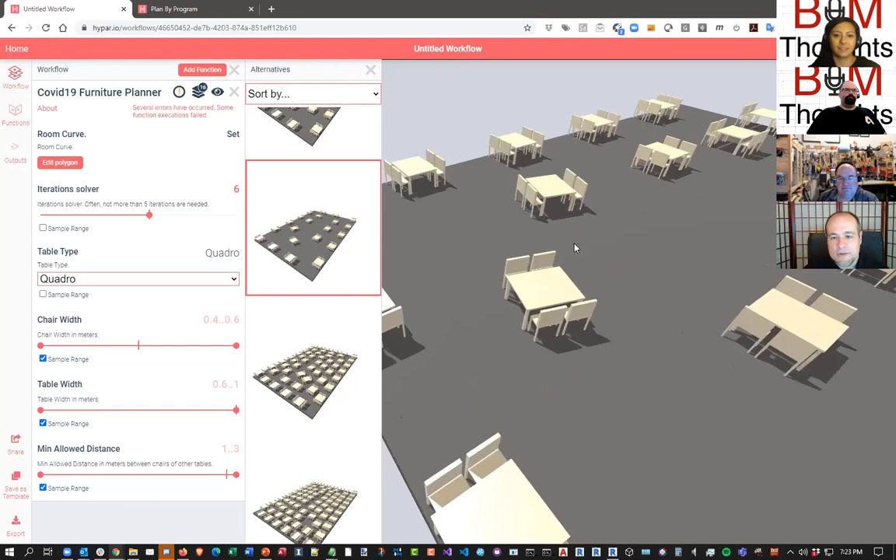And of course, for some of the work we're doing right now for customers, we'll start introducing things like being able to bring in content from Revit or other places. This is great. This person is actually just making kind of procedural content, I believe.

So again, the point is, let me open up the about here - like we didn't do this, it just surprised us, right? That somebody had done this, and then we found it on here, and we're like, hey, and we're playing with it. Well, a golf clap to Mr.

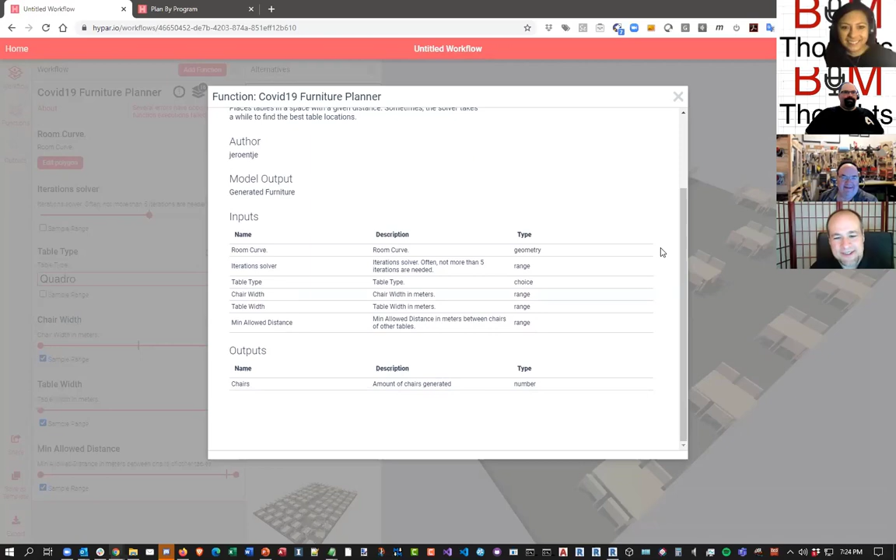Van Lith. Yes, right, I'm sure he listens, and I'm sure his stock just went up in the industry. That's right, yes. Well, and I mean, we're going to see a lot of different things with these types of things, right?

Especially with new buildings, with directional stairwells and different things like that, we're going to see just even wayfinding through a building - trying to get people to go the right direction. I just read that they opened up the Washington Monument finally, because of the earthquakes and all that in Virginia. They had to close it down, and then COVID. But when they opened it up, upstairs you can only go one direction because of the social distancing and all of that.

So it just opens up all different types of computational things that we can look into. Yeah, and I haven't returned to the MFA since the pandemic really started - that's Museum of Fine Arts in Boston for folks. But they have some similar plan and timed entry, and of course these are things that are, I'm going to guess, for most venues not mathematically determined. They're basically kind of taking a good guess and hopefully with some consulting engineers to talk to them about air circulation. And that's a whole other thing.

It's more complicated, which is why I think we haven't seen it yet. But right now everybody's just saying crank up the air circulation as high as it'll go to help. But I'm assuming that there's a point where we're going to actually have some math behind that to figure out what the right air flow should be.

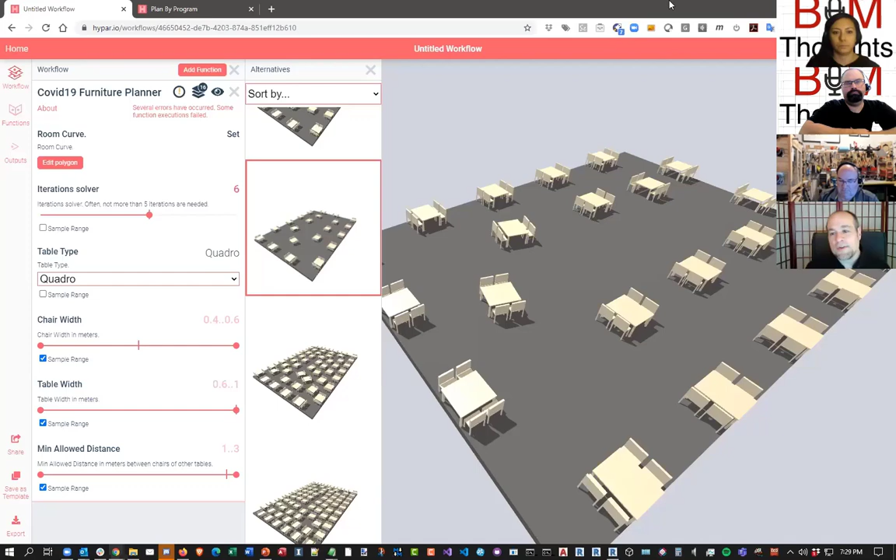Just little things, like if I take this guy out here—one of the things when we first started talking to firms as Hypar, everybody said, well, we always start with a location. And we would see that everybody around the world is making their very own personal location picker. And it's just a misapplication of resources—why do we need two? Maybe we need two, but do we need two dozen?

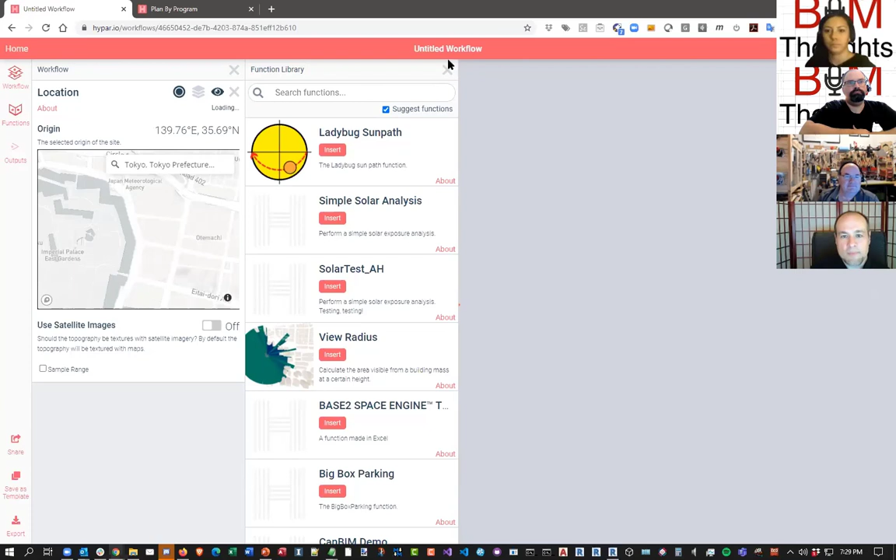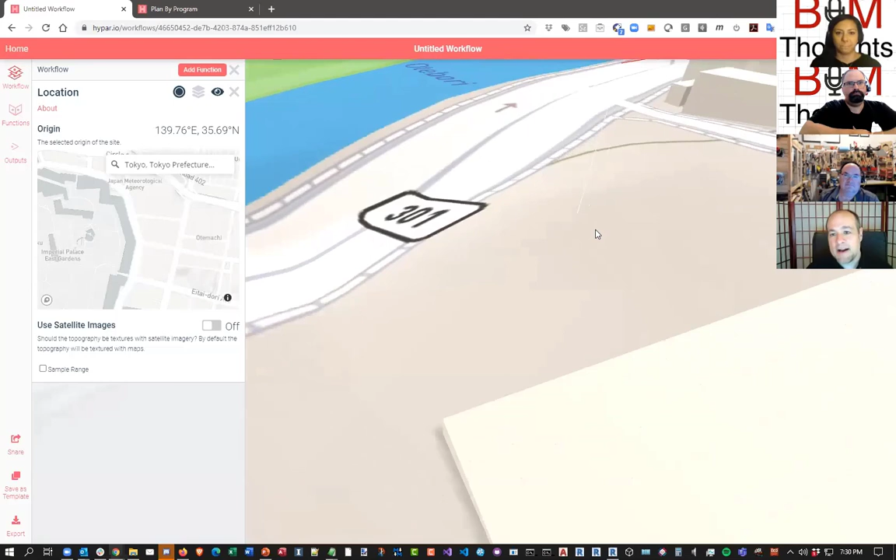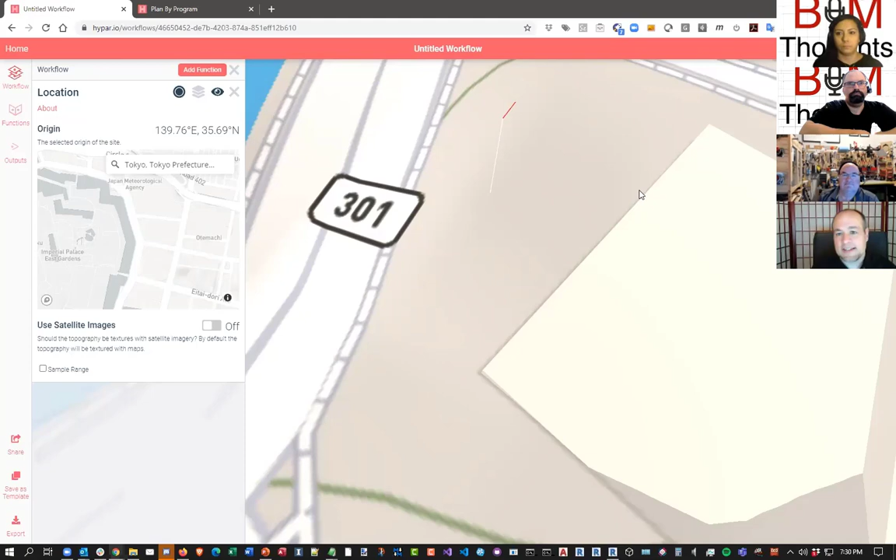So you can pick a location. And of course, from what we're doing here, we didn't go out and map Tokyo and New York to use on Hypar—we're using Mapbox. We didn't have to go to Mapbox and say, hey, wouldn't it be great if you pulled up all of Mapbox and put it back on Hypar so people could use it there. No, there's a little function that just calls out to the Mapbox service with a location, and it gets back the context, and we render it. So that's the idea—we can provide a forum where a lot of these different services can talk to one another in a common language, so you don't have to piece that mosaic together yourself.

You can hire the expert, just like architects do when they hire a structural designer or structural engineer to do the structural work, or an acoustic designer, or hire someone who knows acoustics as a consultant, or a kitchen consultant—anything.

Well, Anthony, thank you so much for joining us today. It has been a blast seeing how far Hypar has progressed over the time. And I think you ought to change your thing from purple or pink to color number 6, is what you should call it. Number 6. Okay, color number 6—that's for my AutoCAD friends who know what the color numbers are.

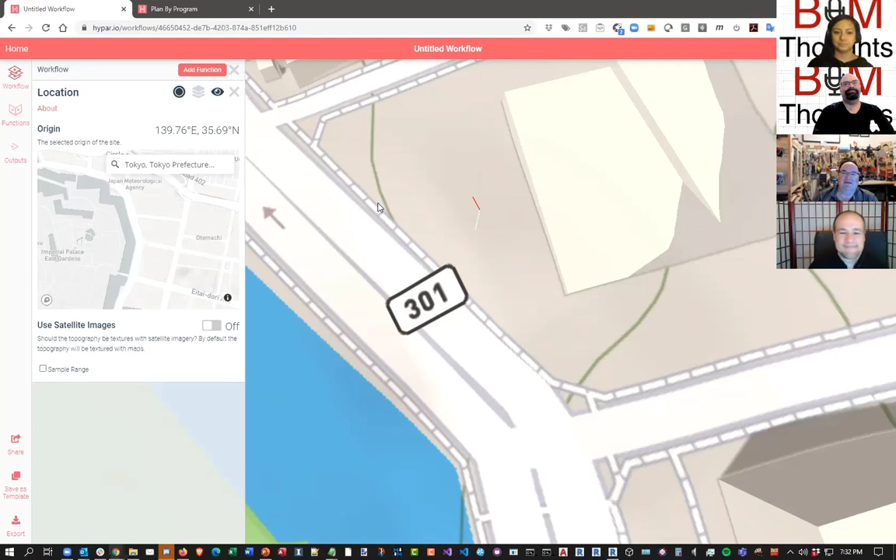Great, I'll make sure to join that. All right, thank you. Thank you, Dana. Thank you, Carl. And we hope to see you again—now that we're doing this again—real soon.